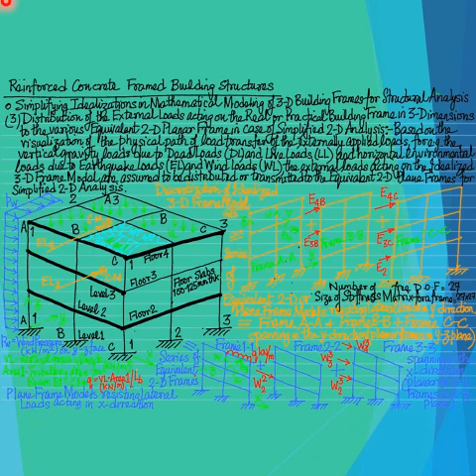Well, as we discussed earlier, the next step after the formulation of the mathematical model for the 3D building frame for purposes of structural analysis is the calculation or characterization of the externally applied external loads such as the gravity loads, the vertical gravity loads shown acting on the top floor or the roof of this 4-story

building frame shown in 3 dimensions, the wind load shown acting as a wind pressure denoted as PW, and the earthquake loads denoted as EL, which act as inertial forces through the center of mass of each floor mass.

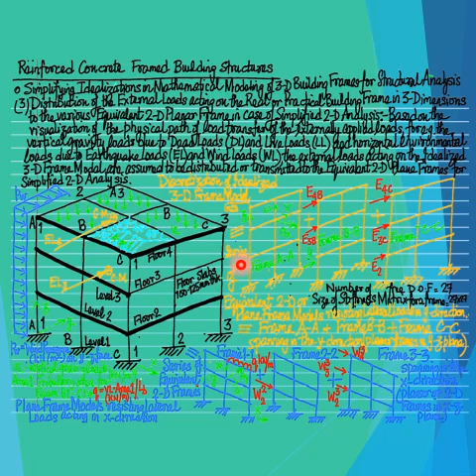So as we were discussing the structural action of the idealized three-dimensional frame model, more popularly known as the space frame model, representing the actual or real three-dimensional building frame that is constructed in the field.

In order to understand and visualize the mechanism by which the externally applied loads due to external effects such as vertical gravity loads, the lateral or horizontal wind loads, and the lateral or horizontal earthquake loads, one needs to intuitively consider the path of the load transfer of the external loads just mentioned

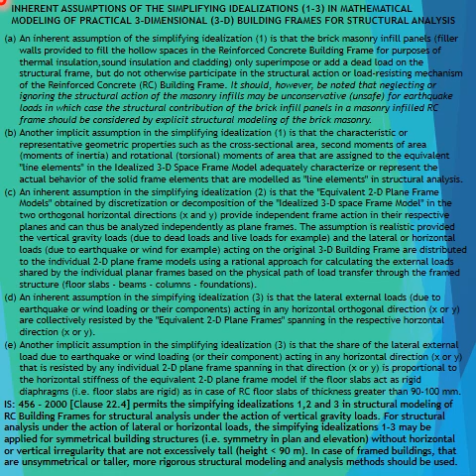For most or majority of real or actual reinforced concrete building frames that are constructed in practice in India, there is another simplifying idealization that is employed for mathematical modeling of three-dimensional building frames for the purposes of structural analysis in the structural design process of only reinforced concrete frame building structures.

That is, simplifying idealization number 4 that we'll discuss today is applicable or valid or required only for the mathematical modeling of reinforced concrete three-dimensional building frames for the same purpose of the structural analysis of the mathematical model or the idealized frame model in order to complete the structural design process for reinforced concrete frame building structures.

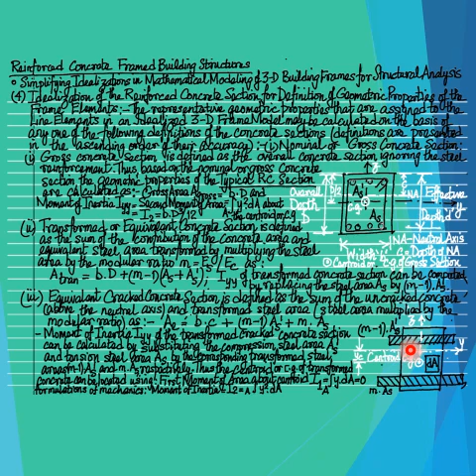And so therefore, substituting the depth of the neutral axis C in place of the overall depth capital D in the cross-sectional area results in a more accurate characterization of the effective concrete section.

Today we will summarize the structural design process, including the first principles of mechanics implemented for mathematical modeling of reinforced concrete frame building structures, and the methodology of simplification of the structural analysis mathematical models for determining the internal actions in the individual frame elements of reinforced concrete building frames as part of the structural design process.

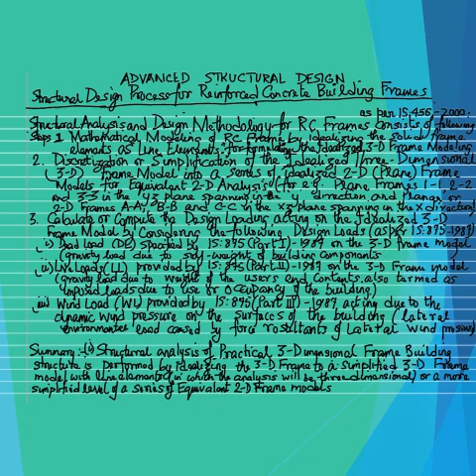Continuing our discussion on the structural design process for reinforced concrete building frame structures that are constructed in practice, the third step, as we were discussing earlier, in the structural design process is the computation of the design loading that is to be considered to act on the reinforced concrete building frame structure for the purposes of the structural analysis of the mathematical model, that is the idealized three-dimensional frame model or the space frame model, or the equivalent two-dimensional frame models or plane frame models as an alternative for simplification of the analysis.

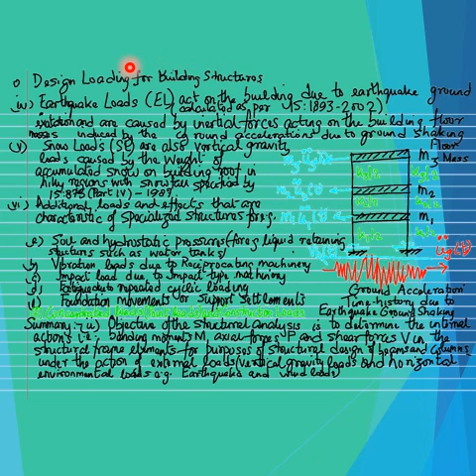The mechanism of the action of the earthquake forces or earthquake loads is fundamentally different from that of the wind loads, as earthquake loads are induced by virtue of the ground acceleration due to the earthquake ground shaking, thus inducing inertial forces on the floor masses.

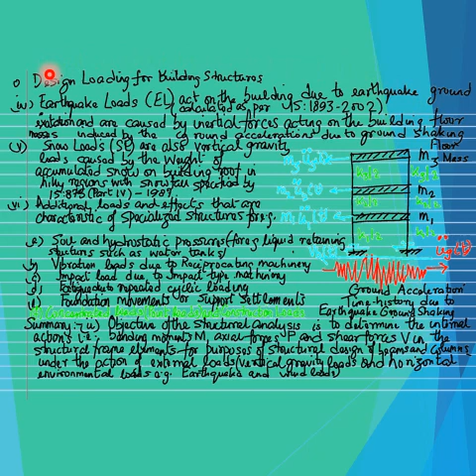And these inertial forces that are induced on the floor masses by virtue of the ground accelerations due to earthquake ground shaking act through the center of mass of the floor masses shown in the figure of the idealized three-dimensional frame model or the space frame model in a previous slide.

Well, the inertial forces that are induced as a result of the earthquake ground accelerations on the individual floor masses, for example M1, M2 and M3, are displayed in this figure as a schematic for visualizing the earthquake-induced inertial forces on the individual floor masses M1, M2 and M3 as shown in this figure,

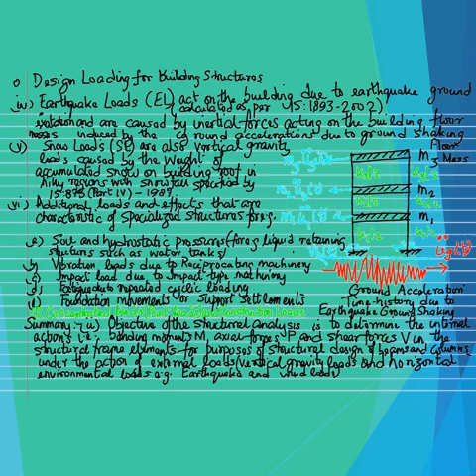After completing the step 3 in the structural design process for reinforced concrete building frame structures, that is, after completing the characterization and modeling of the externally applied loads due to external effects such as vertical gravity loads and the horizontal or lateral earthquake and wind loads, as well as calculating the design loading that is to be considered in the structural design of the reinforced concrete frame building structures.

The next step, that is step number 4, in this step-by-step methodology for the structural design of reinforced concrete frame building structures is the structural analysis of the mathematical model or the idealized frame models that are derived or formulated in the step number 2 of the structural design process.

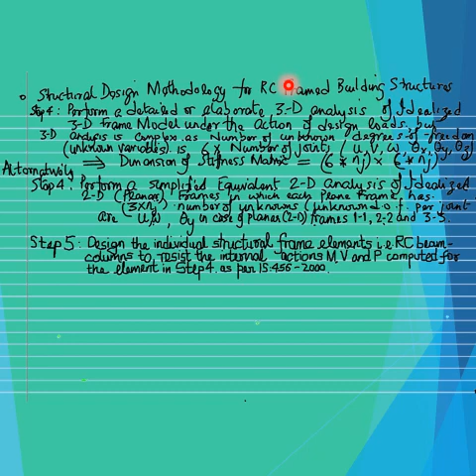And the simplified equivalent two-dimensional structural analysis using the idealized 2D frame models or the plane frame models obtained by discretization of the detailed idealized 3D frame model or the space frame model into series of such equivalent 2D frame models or plane frame models in each of the two orthogonal directions x and y in the horizontal plane is more amenable to physical interpretation or visualization of the physical significance of the output or computational results for the unknown internal actions.

Well, it is noteworthy to mention once again that in comparison to the detailed or elaborate three-dimensional structural analysis of the idealized 3D frame model or the space frame model, the equivalent two-dimensional structural analysis of the idealized 2D frame models or the plane frame models present a much smaller stiffness matrix that is to be inverted to solve for the unknown degrees of freedom.

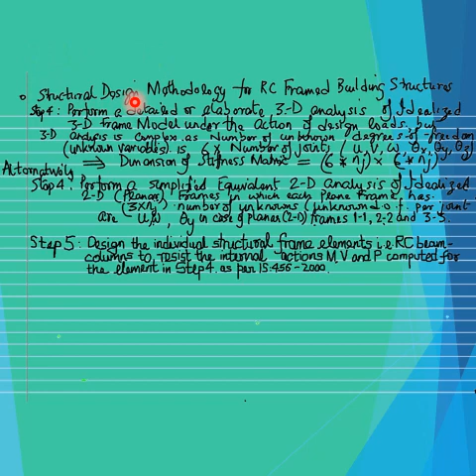Well, proceeding to the next step, after having completed the solution of the unknown degrees of freedom or the unknown internal actions, by performing a detailed or elaborate 3-dimensional analysis as option 1, or a simplified or equivalent 2-dimensional analysis as an alternative option number 2. The next step, that is the step number 5 in the structural design process for reinforced concrete building structures, is the final step in the step-by-step structural design methodology that is presented in the 2 previous slides and the present slide.

Step number 5 is the final step in which the individual structural frame elements, for example, the reinforced concrete beam and column elements or beam column elements, are designed to resist the internal actions, that is the bending moment M, the shear force V, and the axial force P acting at the 2 ends, as well as the span of the structural frame elements.

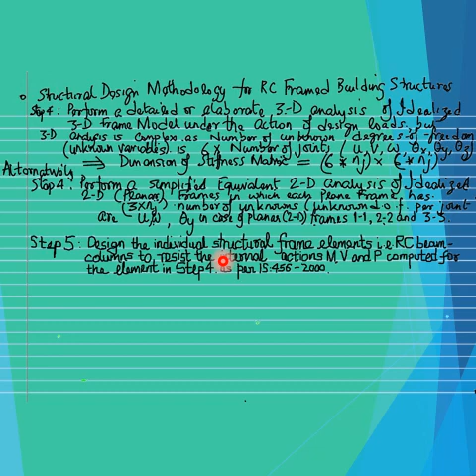And the structural design of the individual structural frame elements, for example, the beam elements, reinforced concrete column elements, or the reinforced concrete beam column elements, to resist the internal actions M, V, and P acting along the span of the individual structural frame elements. The structural design is performed in accordance with the provisions of IS 456:2000 revision, the Indian Standard Code of Design Practice for structural design of reinforced concrete structures.